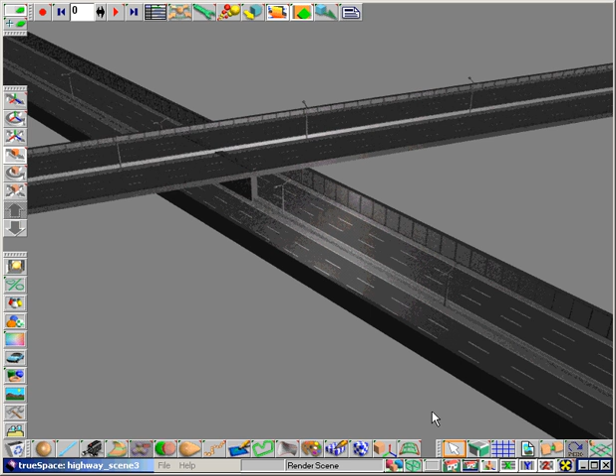Now let's modify the lights to make it seem like a true outdoor scene. By going into the light library and selecting none for the lighting setup, all the lights in the scene are erased. We're going to add our own lights now.

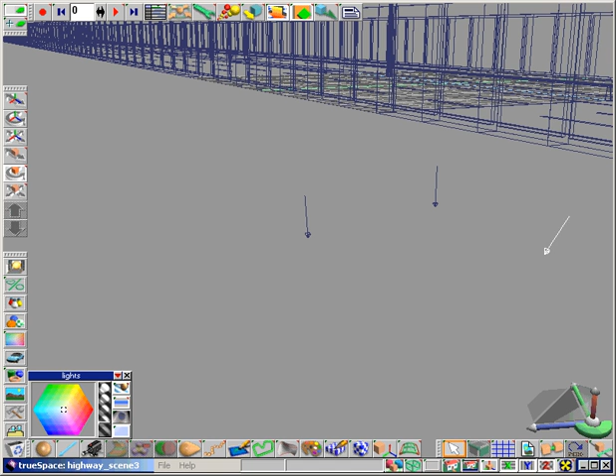The most common lights for a scene that takes place outdoors is the infinite light. We're going to add 3 lights total. 2 of them will simply be filler lights to slightly illuminate the sides of our scene and objects, while the main light will represent the sun, which will be coming down from overhead and have a much higher intensity relative to the other 2. By rotating these lights around, you can change the direction from where they come.

It's always easy to tell which way an infinite light is pointing, because one end has an arrowhead on it. Rotate the 2 filler lights to angles roughly 180 degrees apart, like this. We'll raise the intensity of the main light and turn on shadows for a nice effect.

If we zoom out and perform a test render, you'll notice the scene is now lighted as if it were outdoors on a sunny day.

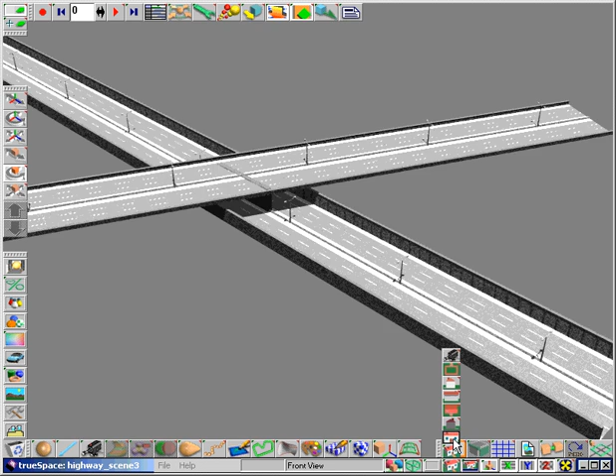We notice the support for the overpass we had placed earlier is protruding through the floor of the overpass, so let's correct this. By zooming in and adjusting the size, we can move the support column down a little so that it no longer pokes out from above.

Even with the most careful planning, you'll find simple little mistakes like this sometimes occur. Just be sure to keep your eyes peeled, because if you don't notice it during the construction phase, you might have to redo your final render.

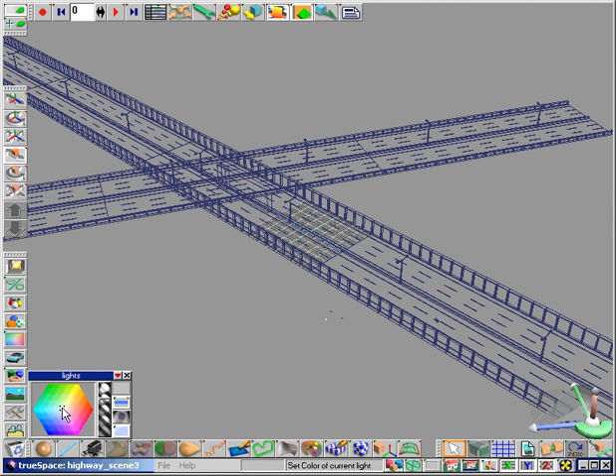We'll give the main light a slightly green tint. I'll explain why in a few steps. Now that this is done, we're going to perform a test render to make sure everything looks good.

We now switch back to the camera view. Performing the render here, we notice that the scene is a little too bright.

By pressing left and right on the arrow keys, you can scroll through objects without having to specifically click on them. We find our main light, and we bring its intensity down a little.

Also, let's take this chance to set our background color. If you remember correctly, many of the scenes in the movie that took place inside the Matrix had a slight green tint to them. The sky, for example, was a faint green instead of blue, so we'll modify the background accordingly. It usually takes a few test renders to figure out what the best lighting setup is for any scene, so feel free to experiment with different intensities, colors, and types until you find the one that suits your needs.

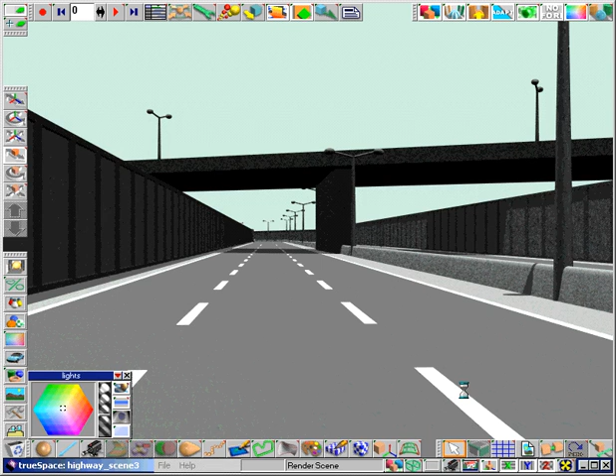Now that the lighting setup is complete, we're going to glue together all the road segments to make the entire road surface into one object.

We're also going to bring the axis to the center of the object. This is just something I like to do as a rule of thumb whenever I complete an object. I found it makes it a little easier on you later, should you need to rotate the object.

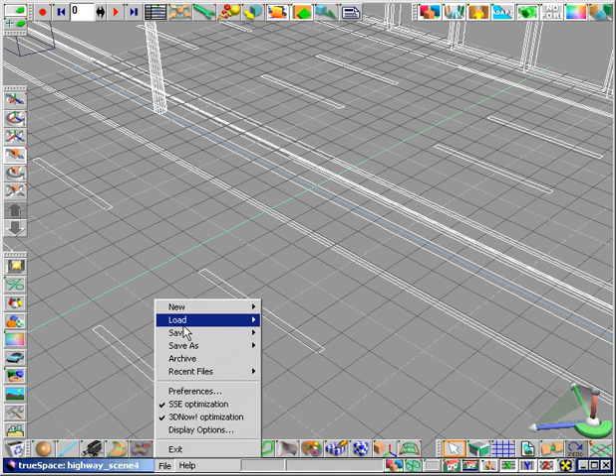The inanimate parts of our scene are now done, so let's start adding some of the cars. I'll load the car model that you saw earlier. This one has a driver in it, which I glued in there.

We're going to need to scale the car down to fit our roadway. So switching to the top view, we use the lane markers to guide us.

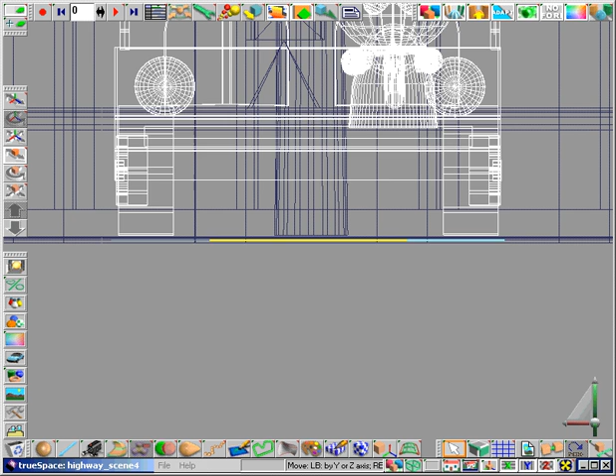Once we feel we have the right size, we go ahead and we switch to the front view. We have to ensure that the car's vertical position is correct and that the tires are on the road's surface. Once we feel that the position is correct, we'll move back to the perspective view.

Now remember, since this will be a crowded highway scene, we need to make several copies of this car.

Remember, in the real world, not all the cars are going to be the same color. So in here you have to make sure that each car is a different shade. You can have 1 or 2 of them repeat the same color, but I'd recommend having no more than 2 with the same one.

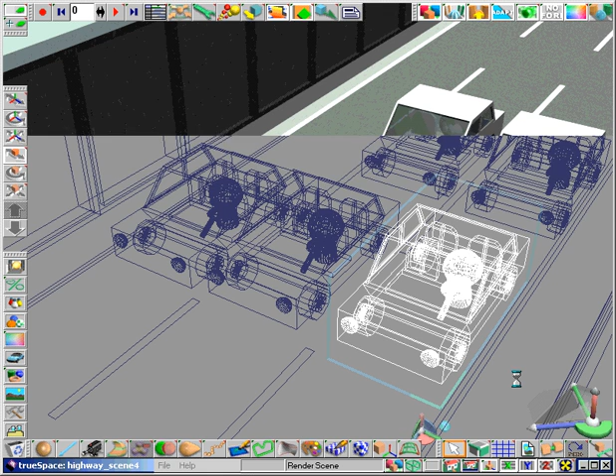At this step, you can give each car a reflective color and add all types of exotic shaders. But we'll just leave it as a simple color for now, to keep the rendering times down.

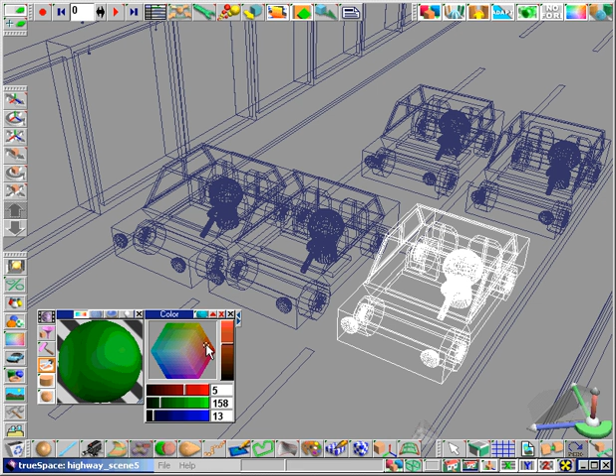You'll find that it's very easy and fun to pile effects on top of one another, but don't get too carried away. The more complex your colors are, the longer it takes trueSpace to render them, especially when ray trace and anti-alias are on.

You have to find the right balance between visual quality and rendering times. After coloring each car's body and roof, go ahead and perform a test render to see how they look.